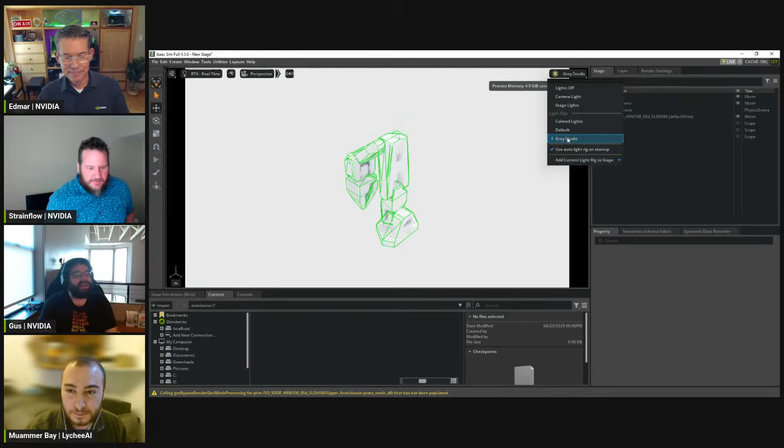So right now we're in Isaac Sim. Isaac Sim is an application from Omniverse, and this is our tool for examining the simulation, which runs all the physics and the collisions, and makes the magic actually happen.

Isaac Lab is a layer built on top of Isaac Sim that's used for vectorizing, which is copying and replicating all of these environments across the simulation, so it can be used for different forms of training. Right now it's mostly focused on reinforcement learning, but we're intending to add other types of learning as well, like imitation and so on.

But I'm curious about the stiffness and damping settings for that import that you did. Did you modify any of those, or did you keep them the same?

Oh yeah, I wanted to talk about that more in detail. I have used the URDF settings here, the already specified settings for stiffness and damping. I've realized that the URDF file has these ratios and parameters which are not loading correctly. I'll show that in a moment. My assumption is that there has been a SolidWorks importer for the URDF, and since SolidWorks is probably operating in millimeters or centimeters while Isaac Sim is operating in meters, some conversions might not be correct. So I wanted to change these afterwards.

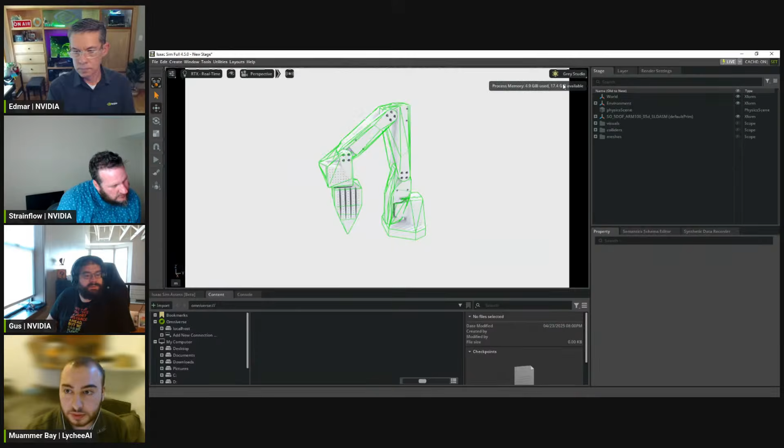Okay, I wanted to show also a very useful tool for starting. It will be under Tools, Physics, and Physics Inspector. This is a very useful tool to see if everything is correctly set up.

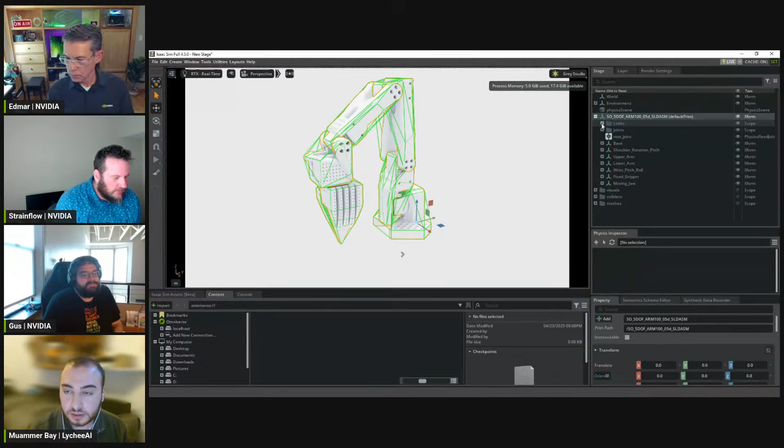So if I click on the robot here, which is already structured well from the URDF file, we have the joints here and all the parts. If I click to actualize, we can see all the joints and play around with the movement. As you can see, the robot is not really set up well because the stiffness and dampings are playing kind of weird. I realized I probably have to change these parameters, and I wanted to show how to do that as well, if there are no questions in between.

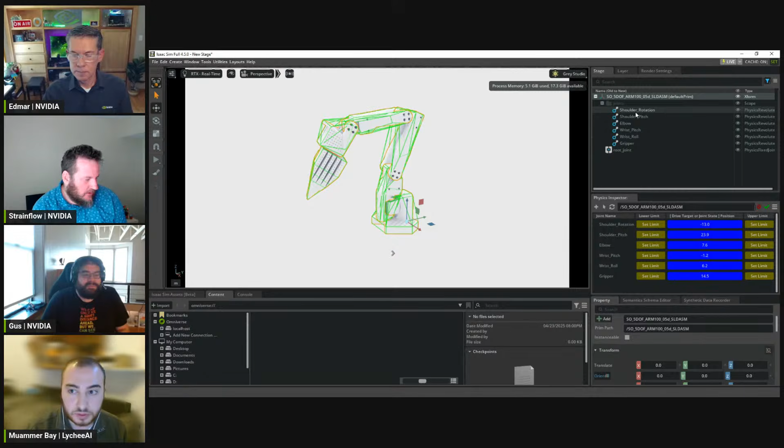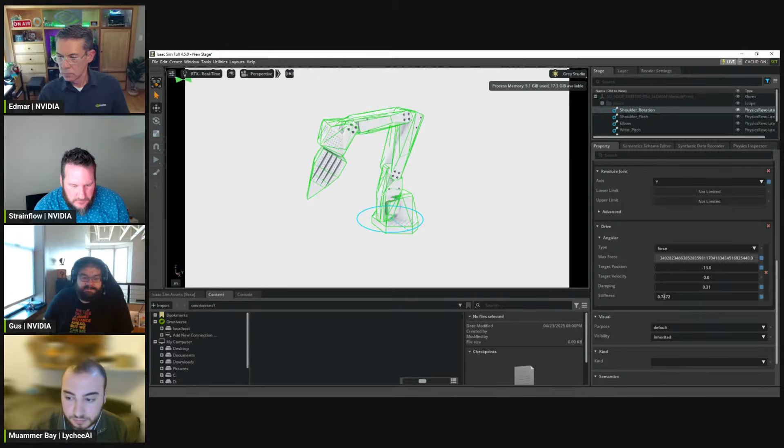What you can also do in Isaac Sim, probably a bit hard to see, but on the top right there's a filter for physics joints, and this will show only the joints here. When I go into the properties, I can see that the damping and stiffness are, first of all, very low parameters, and also the ratio is not set up correctly. When I multiplied it by 100 or 1000 - probably the conversion between centimeters to meters or millimeters to meters - I realized that the values make a bit more sense, but still are not correctly set up, I feel like.

So I just changed the parameters for the shoulder rotation, for example, and as we can see, it's already moving smoother and more realistic than what has been specified from the URDF.

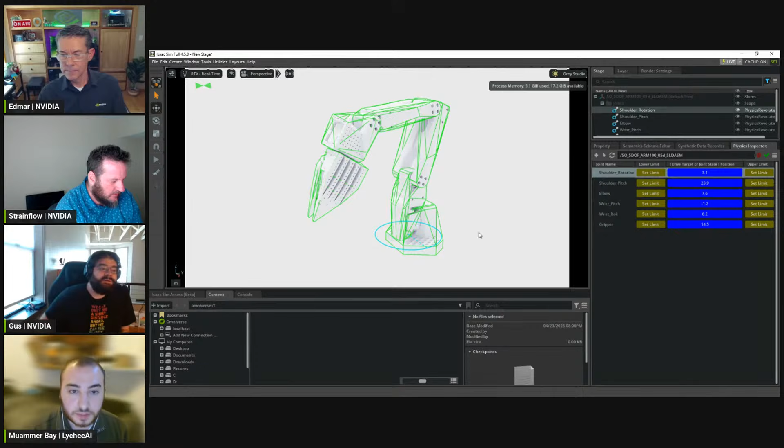At this point, I would also like to mention that I do not have to specify these settings here, because I will do it in Isaac Lab, kind of manually inside the configuration. So I will not play around with these for now, but there are still some steps that we have to do before we can work in Isaac Lab for the reinforcement learning task.

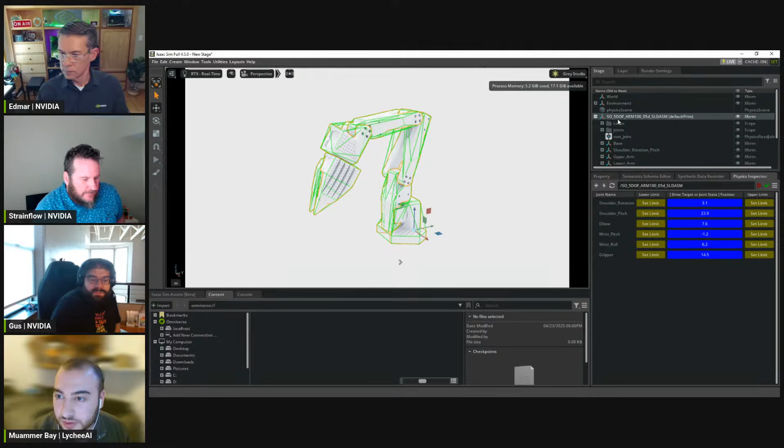Okay, I will continue with that. First of all, one very important step I realized is that we have to specify the articulation root. If we filter the articulation root here, we can see that it's done for the root joint, which will not work for Isaac Lab. Maybe one of you guys can tell me more about how selecting the root joint doesn't work as the root articulation for Isaac Lab.

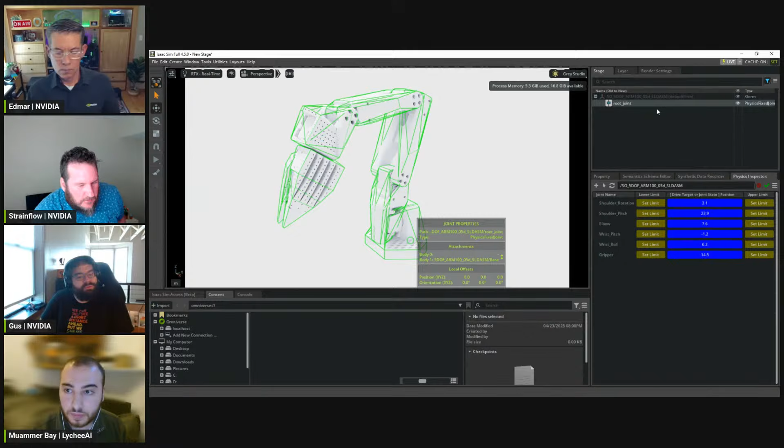Yeah, so the root should be a prim, not a joint. The articulation root - I think you specify it if you go to the root of the robot. So if you disable your filter, go to the root of your robot, and then go to add physics articulation root. You're on the whole container - you probably want to be on the base mesh, not the overall container. It'll somewhat work with the overall container, but it'll just pick one of those randomly to be your articulation root. You want that specific one to be your articulation root.

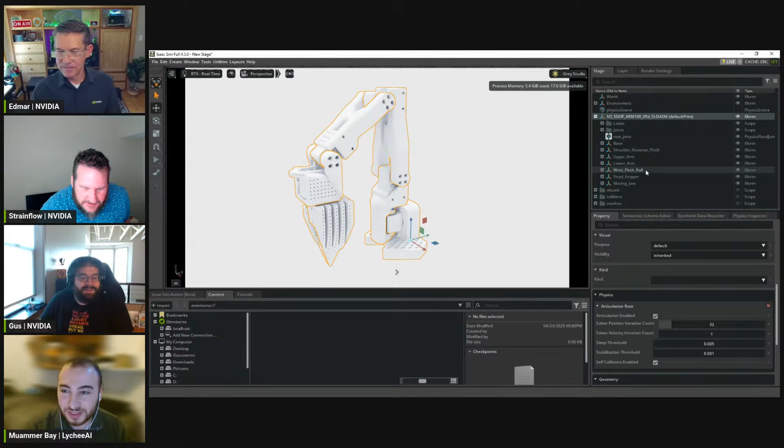That specific one? Okay. Then you want to remove - make sure you remove the articulation root. You just got to scroll down to the physics section on that root prim, find articulation root, and get rid of it - click on the X. Yeah, there you go. Awesome. All right, now you can add a new one.

Yeah, sorry, you're there for a minute. Yeah, no, I wanted to say that I've tried it before, and for me it has worked on this one. So I'm a bit afraid it will not work now if I set it like this.

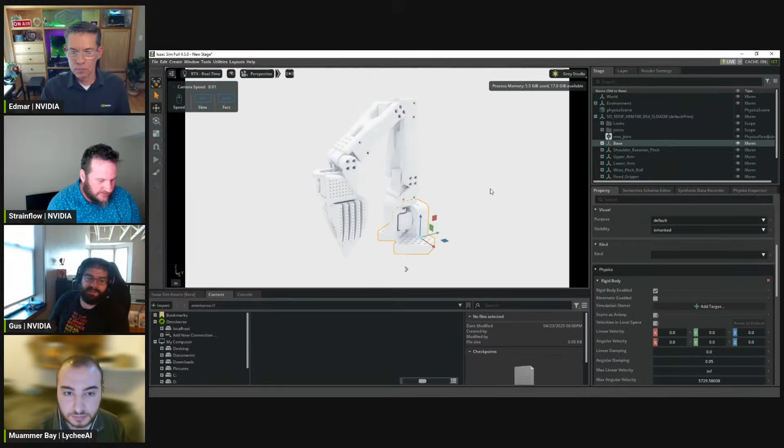But yeah, I always set it on the root prim of the robot, and I let the system identify it, because what the articulation is going to do is notify the physics engine how it needs to access the data in a vectorized form. Behind the scenes, there's this thing called the Tensor API, where all of this data is kept as big giant matrices. The articulation root defines the tree traversal that figures out what all those shapes have to be.

There's a whole stream we could do on getting meshes ready to be instantiable. A lot of people on the forums have problems with adding their robot to Isaac Sim, and when it appears, it's just an empty transform with no meshes there. Part of the reason has to do with this vectorization process—you have to set up the asset appropriately to be copied and instanced many times over the course of the simulation. If that process isn't done properly, you can get all kinds of weird consequences.

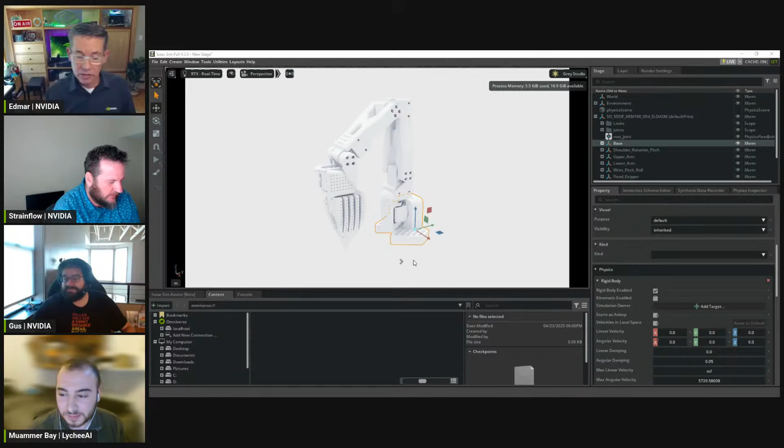Sorry, I didn't mean to derail things. I just want to point out we have a good question here—actually two people asked the same kind of question. What are the stiffness and damping of the joints? I didn't find how they're used in the docs. And Kamade, another viewer I met at GTC, asked is there a calculus for damping and stiffness for Isaac Sim other than just play and sim?

What's going on here is in order to keep the sim performant, we simulate all the joints and motors as dumb as possible. There isn't an electromagnetic sim that simulates stators and stuff. What we have is a simple spring system, and that spring has a spring coefficient, and then there's a damping factor that determines how the spring responds to an applied force. So if you're talking about a rotational force, you're talking about an applied torque and the damping term on that torque—the stiffness and damping coefficients, though I'm not privy to the actual intimate details of how the simulation is done, but it's modeled off of this spring model for the joint.

The stiffness determines how quickly the joint goes to the target you're setting. If you have a drive position or a drive force, the stiffness tells you how quickly that's going to be applied. The dampening tells you how susceptible you want it to be to oscillation—how rigid do you want it to go to that location and stop hard, or do you want it to be a more graceful easing. Those are the parameters that determine that. There's also another parameter called the gain that has to be tuned to get it to match sim to real, but that's a different conversation.

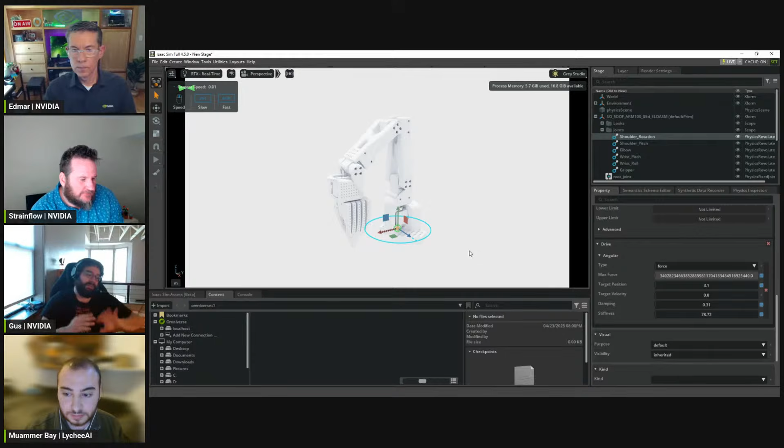Well, those stiffness and damping parameters don't have exact physical meaning—they're more like simulation parameters. When you do sim-to-real transfer, there's a whole type of domain randomization that specifically focuses on randomizing the physical parameters of the simulation, so the policy becomes robust enough to handle the real world with unknown parameters, hopefully within the bounds and range of the simulation randomization we did.

I just want to reiterate that—yes, it's a PD, and I was so confused by that at first. When I was getting started, I was trying to make the simulation as realistic as possible, and coming from a mechanical engineering background, it drove me nuts that those damping and stiffness parameters in the joints didn't have direct physical correlations. But with AI and training, it doesn't always have to be perfectly accurate—it's okay as long as you randomize as you're training.

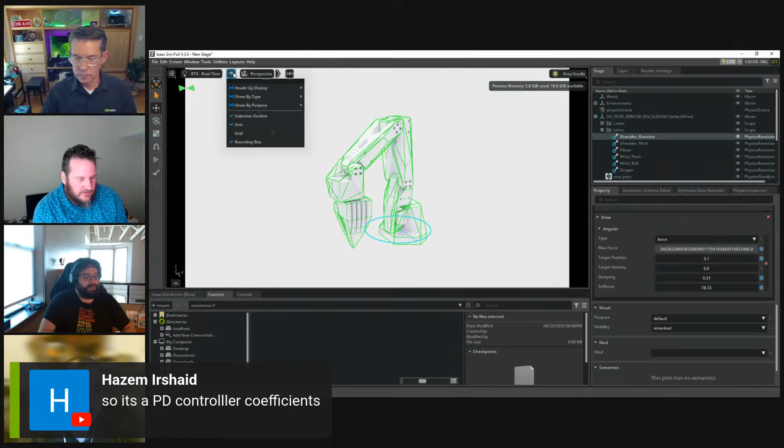One of the members, Hazem Irshaid, asked about the controller - I believe it is a PD controller, and I don't think there's an integral term in the controller for the joint. Isaac Lab provides an actuator layer that gives you much more definition over how you want that joint to be actuated and how you want that simulation to take place. But I think as a default, it's just a PD drive coefficient.

This feels great, I'm learning a lot here. Awesome, so thank you for that.

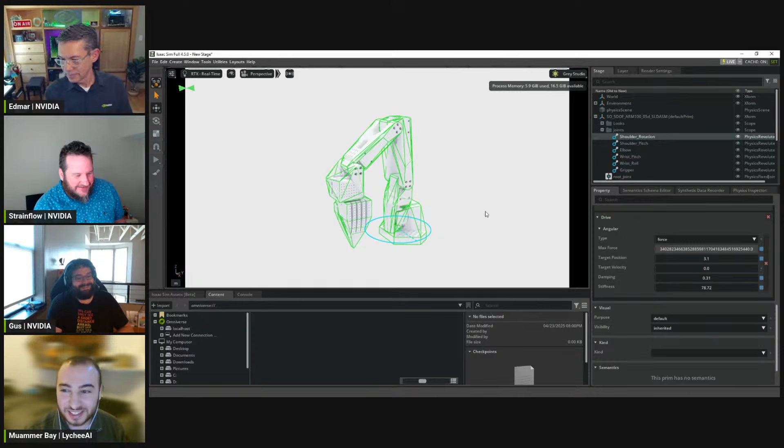I guess I can maybe continue, or do you want to add something? Please, go ahead. I just have to check if I'm not missing a step.

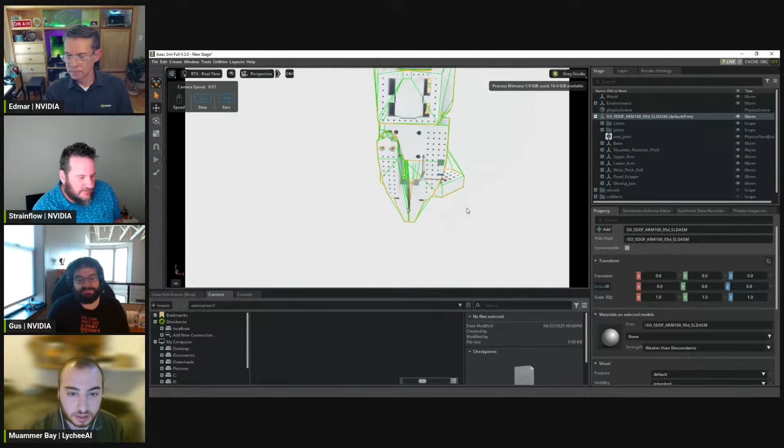The one last thing I would want to change is we see these collision meshes here, the green outlines. Those are the collision meshes, and I want to change it, at least for the gripper, because I want to pick up a cube. When I tried it the first time, I realized that these are not accurate enough.

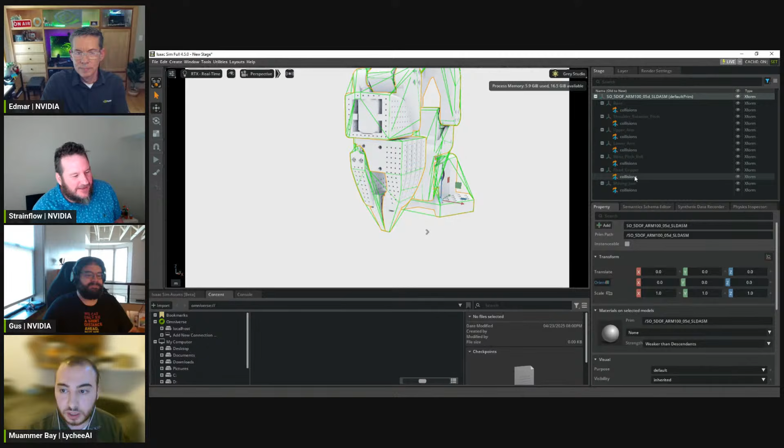I noticed in your import that you chose the convex hull instead of the convex decomposition. I was like, oh, that's interesting. But I thought, maybe we should explain what these are.

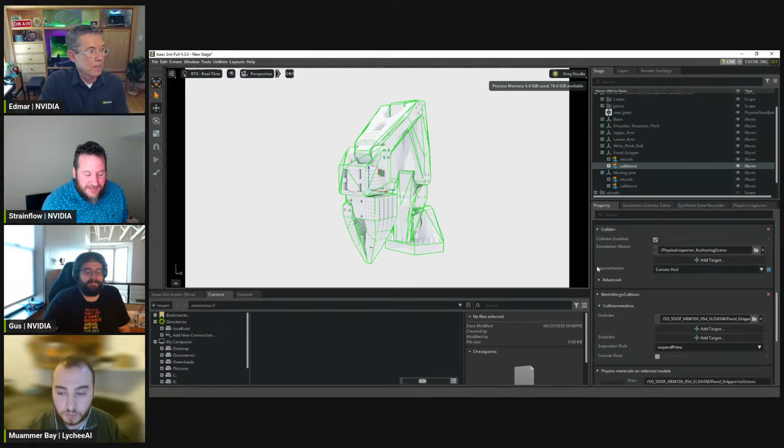It's really easy to see with that base part - if you look at the green lines, you'll see there's some space. The green lines are the collision mesh, and the triangulation in the convex hull is like if you shrink wrapped the whole thing, so wherever it dips in, there's going to be some space between your collision mesh and the actual part. The nice thing about a convex hull is they're really cheap to calculate collisions with, so we like them for that reason, but they're not the most accurate. There's this trade-off between how accurate you want your collisions to be versus how quick you want calculations to run.

I think I would do exactly what he did, which is start off with a convex hull because they're cheap, but then go to things like the gripper where you need more accurate contact and collisions, and put a more refined mesh just on those parts. That was exactly what I wanted to do. I tried the URDF importer and chose convex decomposition, and I realized my simulation was way slower because it's harder to calculate. So I wanted to do exactly what you mentioned - convex hull for the entire system, and just specify it for the parts that are needed.

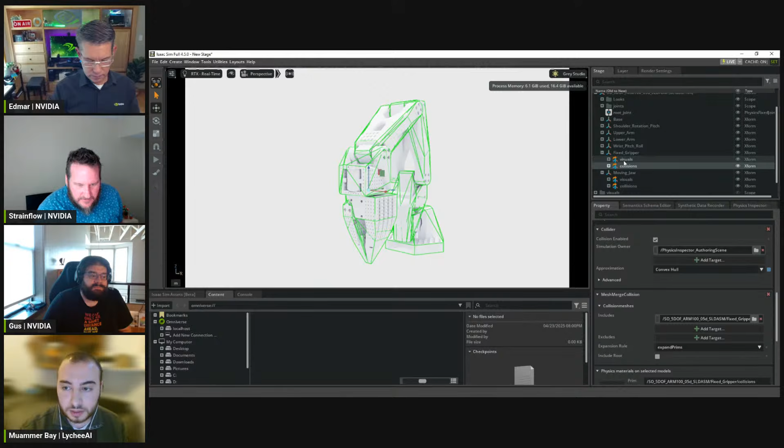So I'll do this under the prim for these, both under collision. We'll change that to convex decomposition. It will take a moment to load - it might take a bit longer to load.

Because we're watching it, it knows when you're watching it, and then it's like I'm going to do it wrong now. Well, when you're sharing your screen, it takes some of your computer's resources, so everything runs slower. That's kind of a classic problem I have.

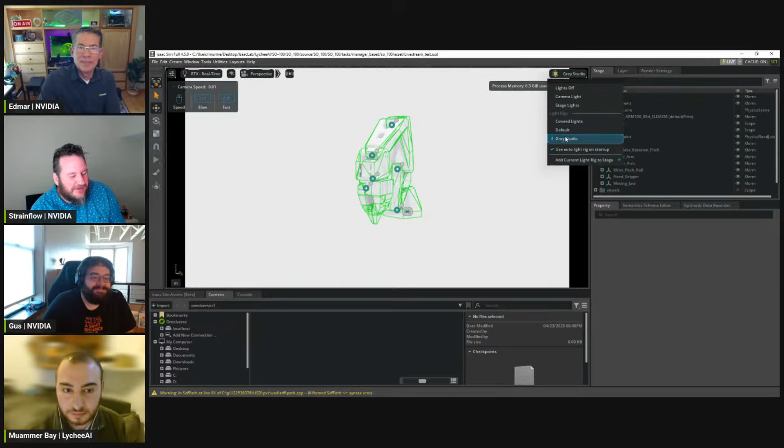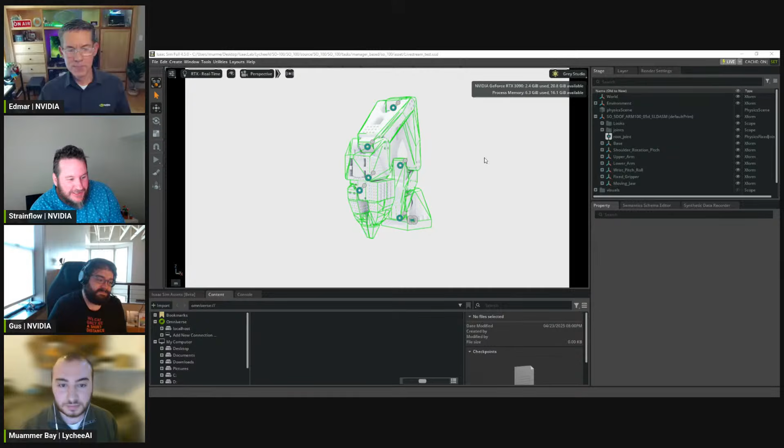But while that's loading, I just want to chime in and say, if you have some funny stuff happening when you run simulations, like your robot arm explodes into a million pieces or flies through the air, there's a really good chance you have a convex hull mesh and self collisions on. What happens is if you have these convex hull meshes for parts like this and self collisions are on, at the first frame you're going to have very deep collisions within the robot, and it's going to try to resolve those collisions with high velocities. So you'll have an exploding robot or solver - it's a fun time.

And so I think the first two things... oh, the Gus bus has arrived. Oh no, the Gus bus has arrived. Gus is an awesome guy to work with, and yes, Gus is awesome. I love it, all aboard, thanks.

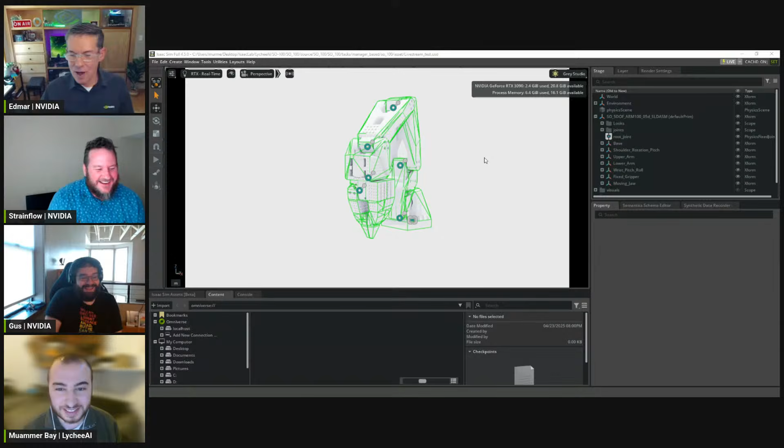We have a quick question regarding the GPU - what are you using right now, Muammer? Just out of curiosity. Yeah, I just activated it on the top right. If you go to type display and device memory, you can see I'm using the RTX 3090.

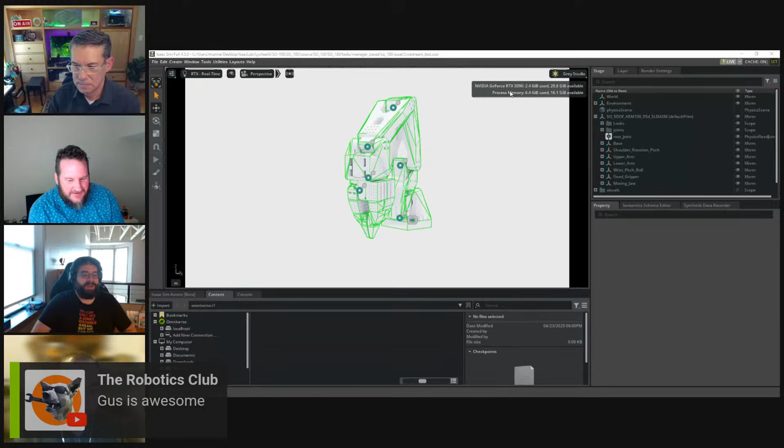That's the same one that I use. It's very reliable. I love the 3090.

Actually, we have an important little question here I just want to address real quick. Can we run Isaac Sim 4.5 on Ubuntu 24 with an RTX 5090? So first of all, you want to be on Ubuntu 22.04. And second of all, we've got a little problem with 5090s right now with the RTX renderer. Is that right, Gus? Well, I don't know enough about specifics, but Ubuntu 24 with RTX 5090, that is about as bleeding edge as you're going to get.

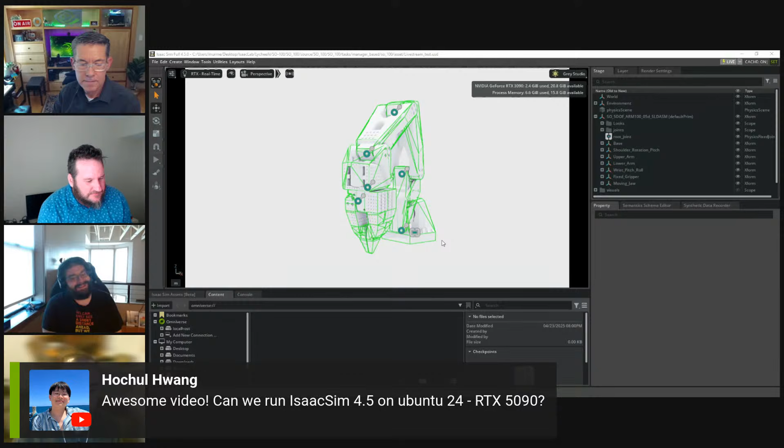Yeah. So eventually, yes, you will be able to run 4.5. If I understand correctly, it's a minor rendering bug that the team is fixing now. Is that correct, Edmar? Yeah, that's right. So there's a rendering bug with 5090s that's going to be fixed in the next release of Isaac Sim. But as far as Ubuntu 24 goes, I would say not until ROS and Jetson are on Ubuntu 24, which is, I don't know when that's going to be.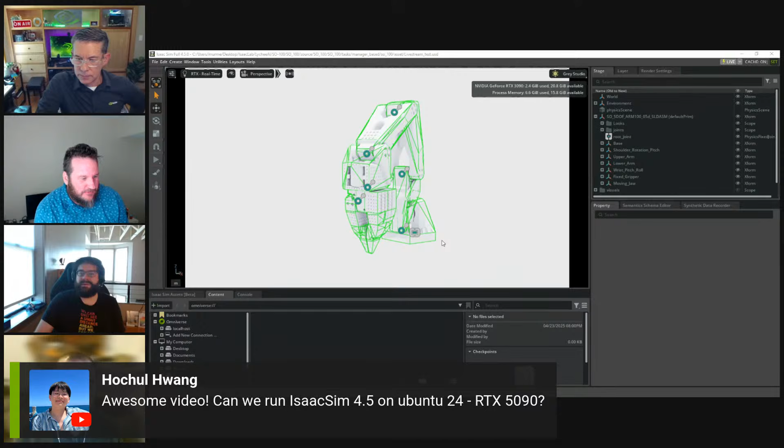I think we kind of follow along with ROS there and support whatever they support. And right now that's Ubuntu 22.04. Yeah. And a 30 or 40 series GPU is going to be your best bet for right now.

Great questions. Yeah, great comments and questions coming in.

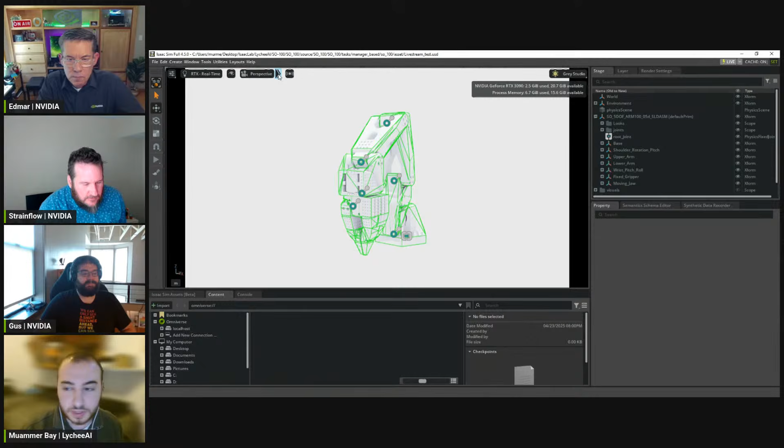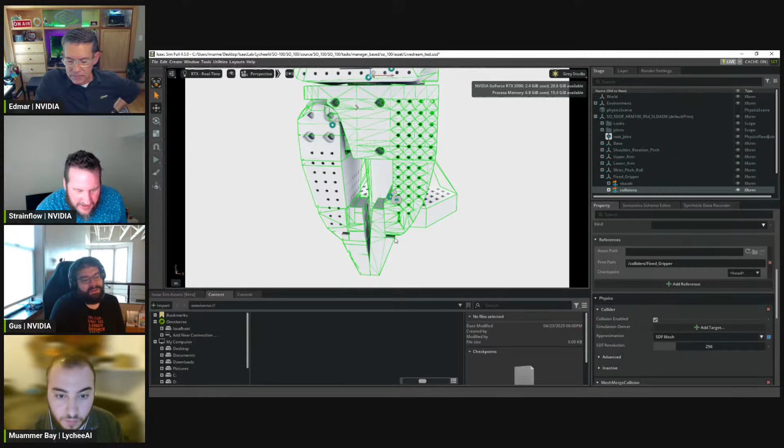And it's showing. It loaded. I just saved it and reopened it because I had an error with my meshes; I couldn't see them anymore. But as we can see, this one is way more accurate, and this one will also work way better to pick up a cube. Have you tried the SDF mesh? No, actually, I haven't. SDF, signed distance function. That's actually my favorite. It's just a little more accurate than the convex decomposition. Thank you, I'll try this one. If you see the really awesome videos with tons of objects colliding, that's usually SDF mesh.

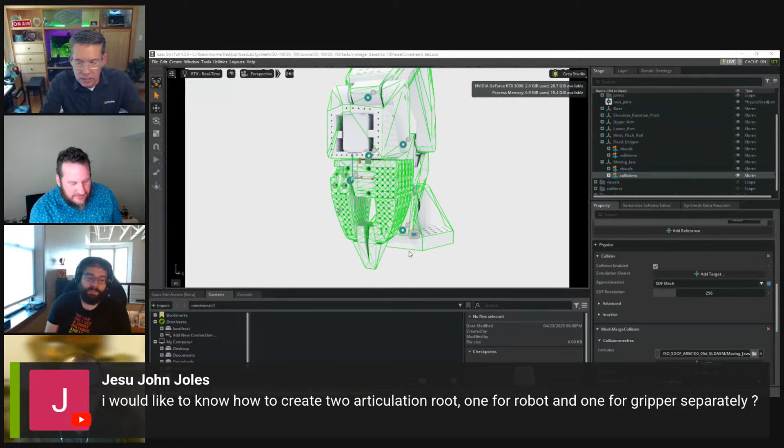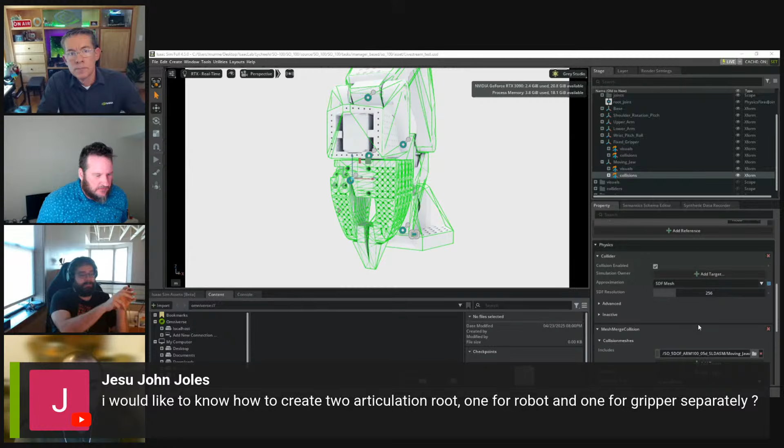We have a question here from a viewer: I would like to know how to create two articulation roots, one for robot, one for gripper separately. You want the robot assembler, and the issue here is that you can't. You want to put an end effector on a robot arm and have it do the thing, right? If you have a single articulation root, then the second articulation root is in the same tree, and it doesn't like that. We have a tool under the Tools menu for robotics called the robot assembler that takes this articulation and modifies the setup so that it has only one articulation root with the gripper articulation in place.

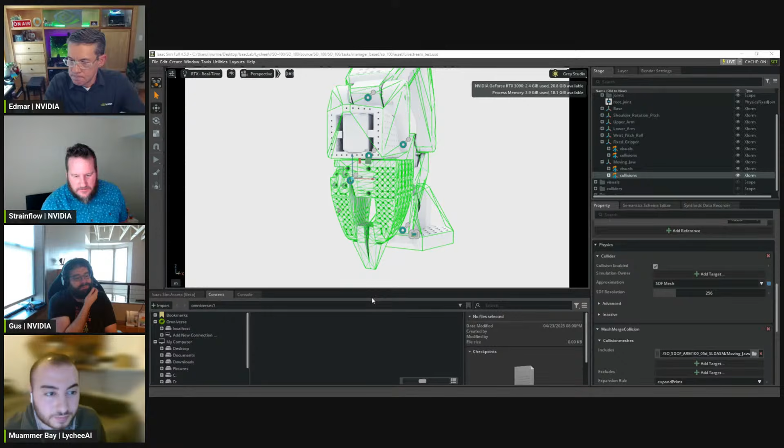I think there is a different way of handling it if you want to control just the articulation for the gripper, like a hand that has a lot of different parts to it. I don't know if that's supported natively yet. So you can't have two articulation roots in the same chain right now as it stands, but there are workarounds, is the TLDR.

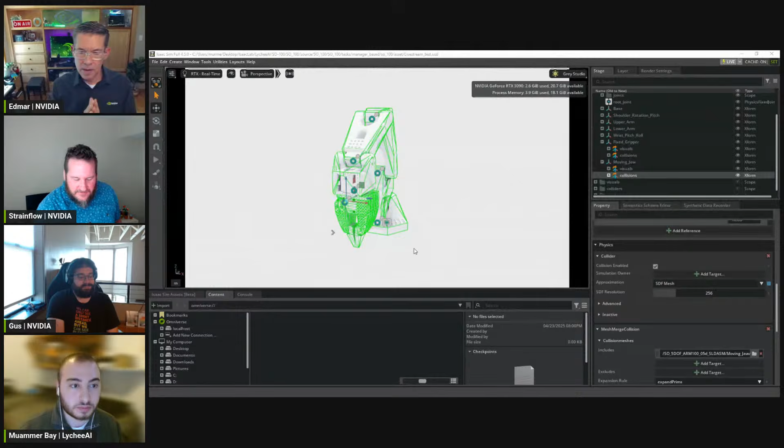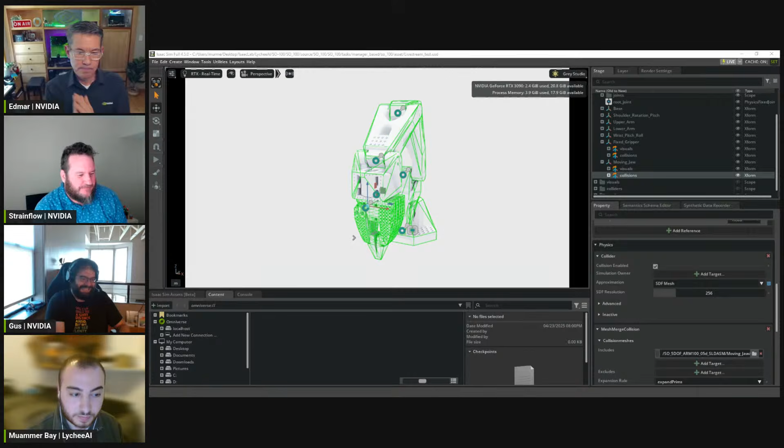Now, while he's doing that, Eric or Gus, do you want to quickly explain the difference between Isaac Sim and Isaac Lab for people who might be joining late or not familiar? Sure. Isaac Sim is the simulation itself. It's the thing that runs all of the physics and the rendering. It runs all of the interfaces for the GUI that you might want to have.

Isaac Lab is sort of a layer that sits on top of Isaac Sim, and it provides all of the API that's necessary for copying environments many, many times in the simulation in an efficient manner. I refer to this as vectorization. The back end is often referred to internally as the tensor API, which is the thing that takes all of the data for all these many simulations and then packages them into nice tensors that can be manipulated on the GPU. So yeah, that's the big difference between the sim and lab.

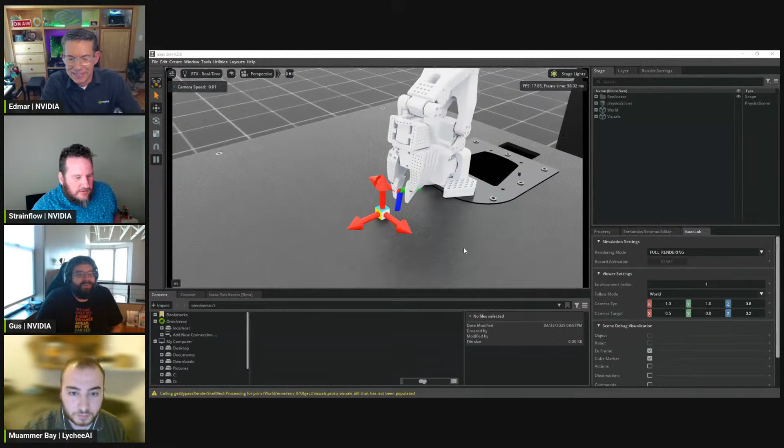Yeah. How many environments do you usually use when you train this thing? Yeah, usually I'm training in headless mode, meaning I'm not loading the simulation on screen. Oh, I guess I have to share my screen. One second. Yeah, usually I use the headless mode, which allows me to have more environments because I'm not loading the... No rendering. Rendering, exactly. And there I usually use 4096 environments. Oh, wow. There you go.

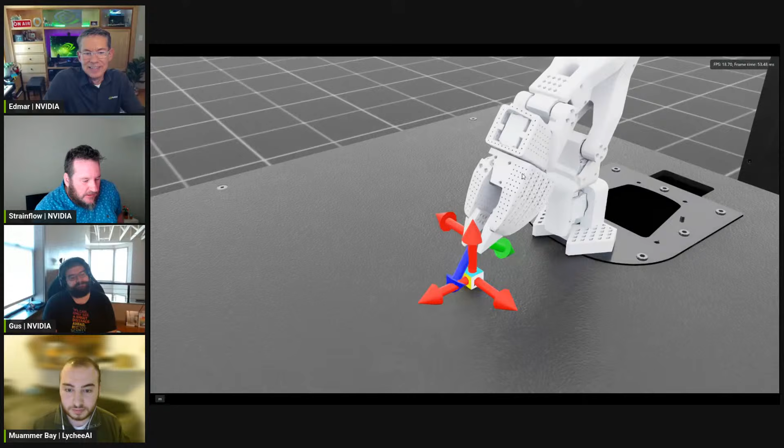And just so y'all know, this is a baby manipulator. It doesn't know anything. Its brain is completely undeveloped. So at this point, it's just taking random actions, but then it gets rewarded based on what Muammer said, probably getting closer to the cube, I would guess. Well, I would love to talk about that. What did you figure out for your reward function for this? Or where are you starting with your reward function? Because this is a process that's ongoing. So what's your initial reward so far?

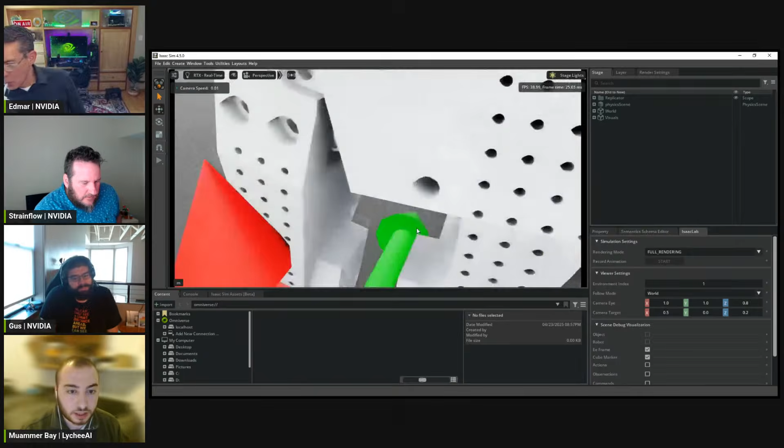Right now in the simulation, or what exactly is meant? I'm confused. Oh, sorry. The function itself. How do you determine what the reward should be? Is it distance to the cube, orientation of the cube? Yeah, I just stopped it to showcase this. So the reward is the distance to the cube. I put a marker for us to see the end effector. This marker here should be in the middle of the cube. And in order for that to happen, this gripper has to be open.

And once it's in the middle of the cube with this end effector, then it's randomly realizing that it can also close the gripper. And once it's doing that, it will do some random actions to randomly lift the cube. And there is also a reward for the cube being lifted. This one is a very high reward, so it's basically learning to lift the cube. And it's doing that by exploration versus exploitation.

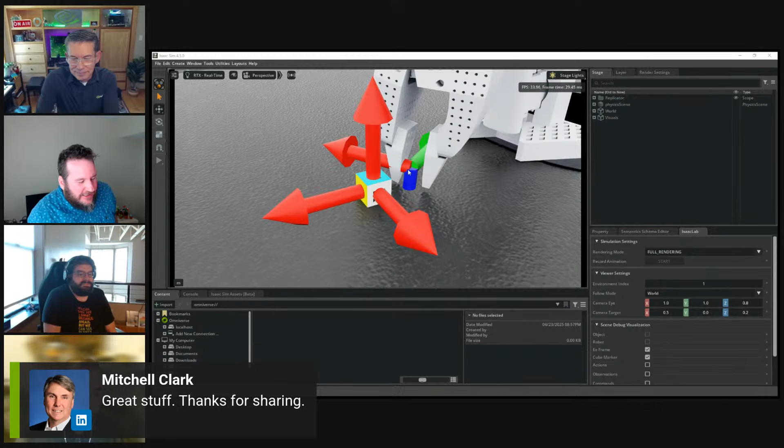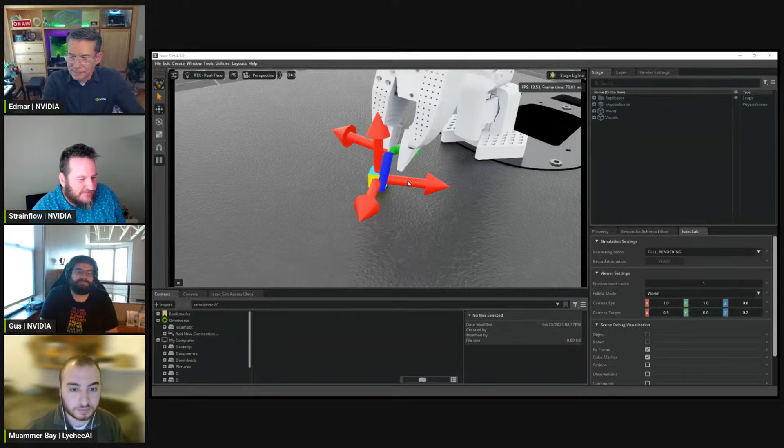That's really interesting because I'm tempted to give it as an observation the next step and break it down into steps for it. First give it a reward for getting into position, then a reward for closing, and then switch modes and give it a reward for lifting it. But you're giving it one composite reward, and it's figuring out how to plan it. It's doing the planning by itself, which blows my mind, that with some simple rewards you're teaching this robot to plan ahead.

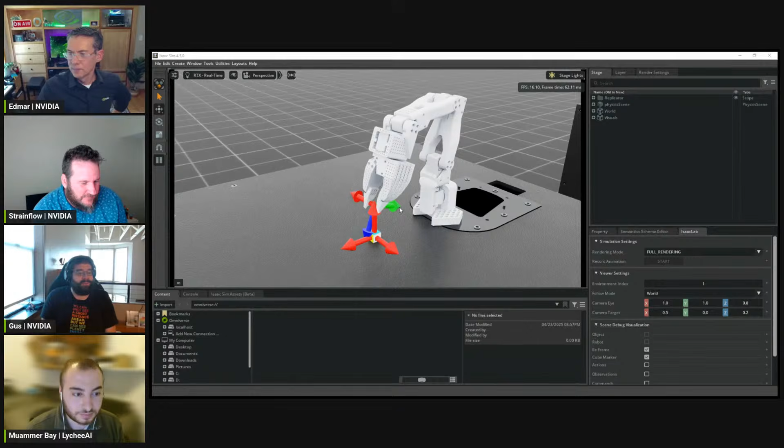Well, that's an interesting thing to talk about, though: what are we really training here, and is it really planning? The policy is a mapping from the state space to the actions of the robot. So we can imagine at every possible 3D coordinate a function that gives us a vector of what direction the robot end effector should move in. The policy is in part what defines that vector field, but there are additional dimensions because it's not determined explicitly by 3D position in space, but by the combination of values of all the joints of the robot.

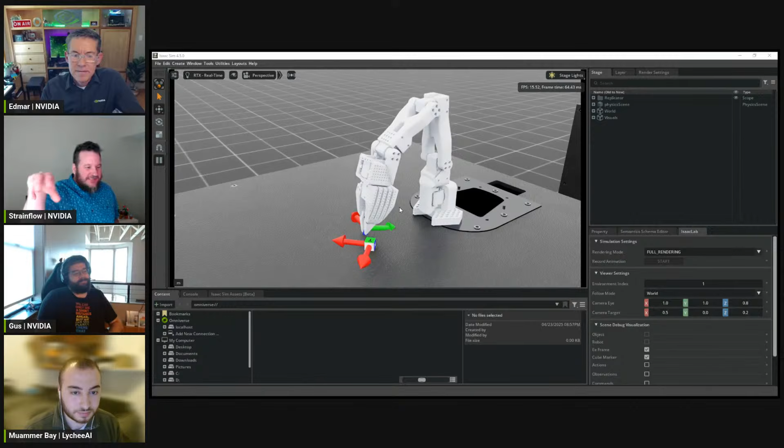Sure. So I think it's learning that the flow around the manifold changes depending on the gripper's state. It learns that if it's in a state where the gripper is not next to the cube, it's got to move to the cube, and it's got to be open. But once it's in a state where it's around the cube, it knows the gripper should be closed and it should be lifting it up. You know?

I hesitate to say that it's planning, right? I hesitate to say that it's like making a sequence of decisions so much as it is learning exactly what you said. If I'm in this state, I have to do this thing. If I'm in this state, I have to do that thing. Yeah. Well, I can see why you don't want to just call it straight up planning, but in my mind, it's a very simplistic form of planning. You know?

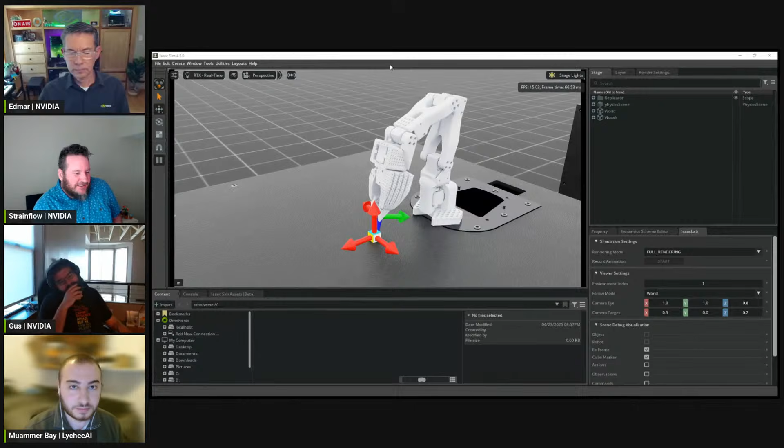It's not like it's figuring out a whole plan. Maybe, I guess you could phrase it. It does different things depending on the state, I guess. But that's the whole point of the Markov decision process: these robots can learn to do different things depending on the state. It's not really decision making, right? I'm being pedantic. It's all right. It's all right.

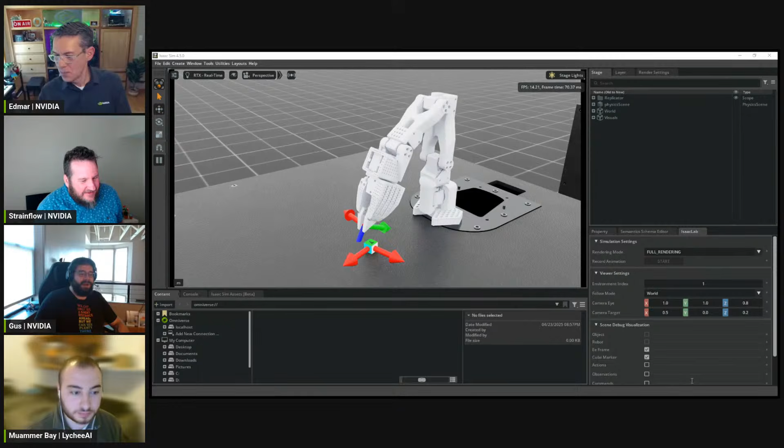Oh wow, it's really going for it. Look at that! Wow. Yeah, it's figured it out, isn't it? With only 32 environments too. Yes. So if you run this headless, what's your final product look like with this current reward function? Yeah, can you run us a replay? Yeah, I can try to find it. I'll just have to look for a second.

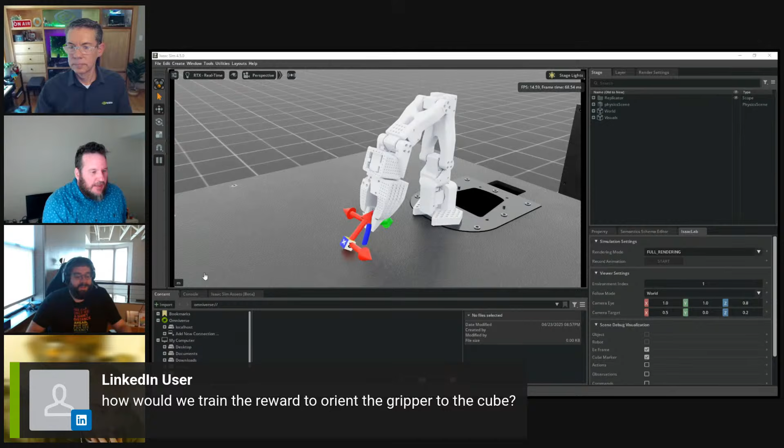Question from LinkedIn user: how would we train the reward to orient the gripper to the cube? Well, he's kind of doing that, he's just rewarding it for getting closer to the cube. But you can also look at the orientation of the cube compared to the orientation of the gripper and reward it or penalize it depending on how close those orientations are. So you can reward it for being closer in position, but also for being closer in orientation. You could calculate the upward face of the cube because you can assume it's not going to be on some cocked edge or corner. So there's always going to be a top surface.

That gives you a position for the normal vector, which is always going to be vertical. And if you want to align to pick up the cube vertically, then you would calculate the vector that points from the center of the end effector to the tip of the end effector, and you'd calculate the inner product between the up direction and this orientation vector and reward when that inner product is close to 1, right? Or reward based on how close the inner product is to 1. That would train an orientation component, right?

Well, there's some details. Let's just say there's some details there. Tons of little ones. Yes, we could have a whole session on just reward tuning if you wanted to. But essentially that's what you do. Yeah. And you watch out for degeneracy. Oh yeah, and there's so many little details, but yeah.

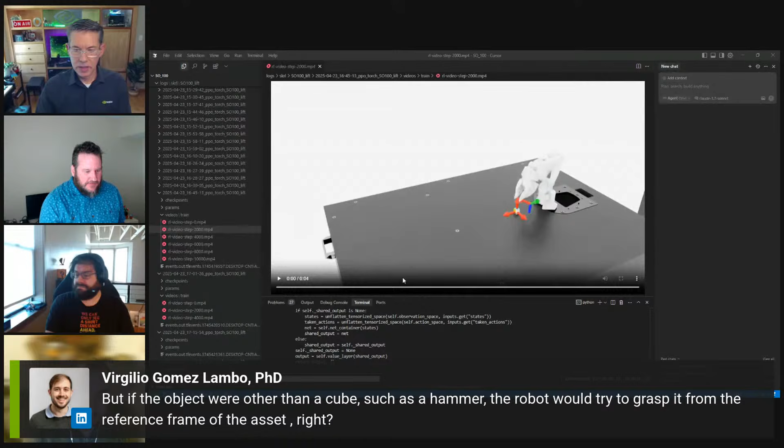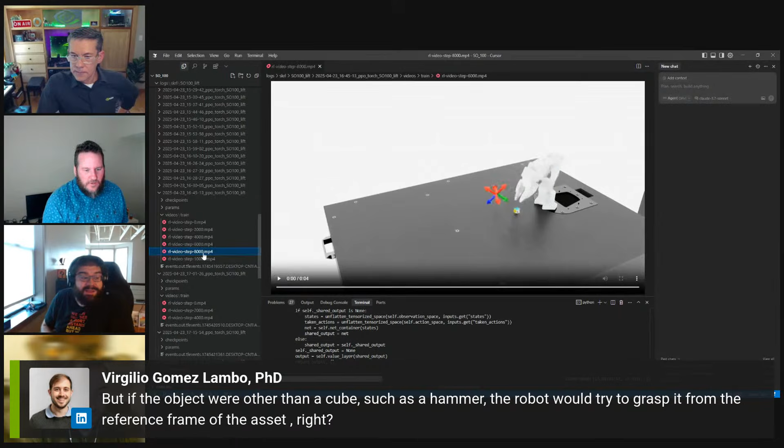If it was other than a cube, how would you do that? So basically, you can tell the robot, you can reward it for lining up or going to whatever you want. It doesn't have to be the center of mass. Wow. Whoa! Just a second. That's fantastic. That is amazing. Holy cow. I just want to quickly mention that is after 5 minutes. 5 minutes? Wow. I think this is 6,000. That is so cool. Fantastic work.

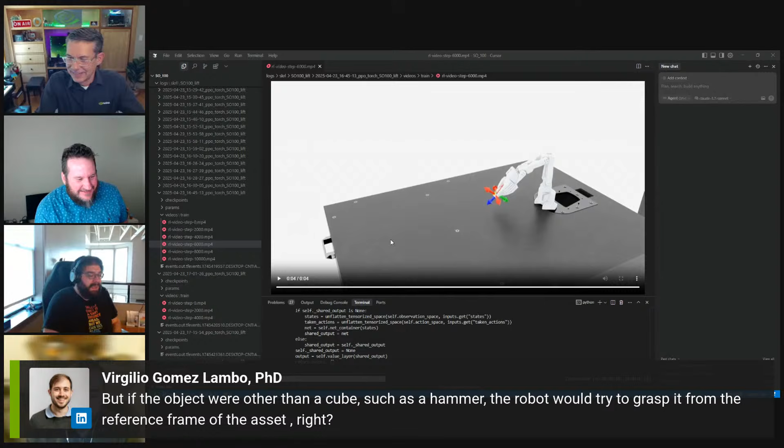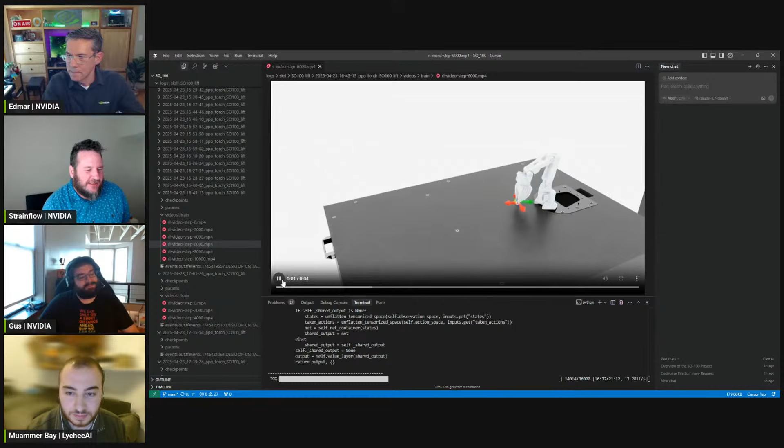Now we need to get it to put the end effector. We need a policy where if we give the end effector a pose, so an XYZ coordinate and an orientation, it will navigate the end effector to that pose. Because then we can do leader follower, right? We can do that exact teleoperation goal. Yeah. Or I was going to say you get rewarded for getting the cube to some other location, so then you have a pick and place. Yes, you could train a task. You could do that.

Interesting. That's so cool. The curriculum is key for sure. I think for this kind of task, having it change depending on the state. Yeah. I love it. It's so fun because I haven't worked with manipulators myself much at all. I've mostly been working with the mobile vehicles, and so it's fun to see a manipulator go with reinforcement learning.

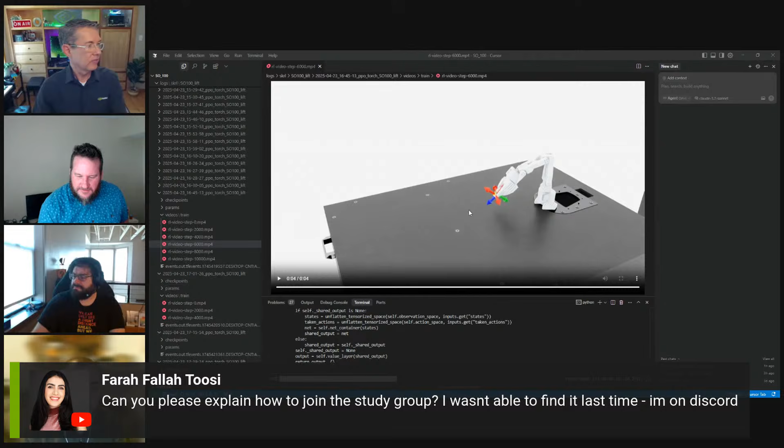If you scroll down on the left, you'll see some channels are broken into categories. We have a category specifically for study groups, more towards the bottom there. You'll see OpenUSD, OpenUSD Arabic, and then Isaac Sim, Isaac Lab.

That is where the Isaac Sim, Isaac Lab study group discussion and weekly meetings happen. If you go to that channel, there'll be a discussion of what's going to be happening, and then they go into the community room. Use that channel in Discord to talk about it.

When the study group actually happens, when it's live and everyone's meeting, which is going to happen in 15 minutes, you go to the community room, which is on the left side. The community room channel has a little icon next to it with a speaker, so you know it's a voice channel.

You just go in there, and that's a channel that lets people actually, instead of typing, you can also type there, but it's more meant for voice. You can unmute your microphone, show your webcam if you like, or use a little text feature that's in there also. It's basically a Hangout, not unlike the one we have right now.

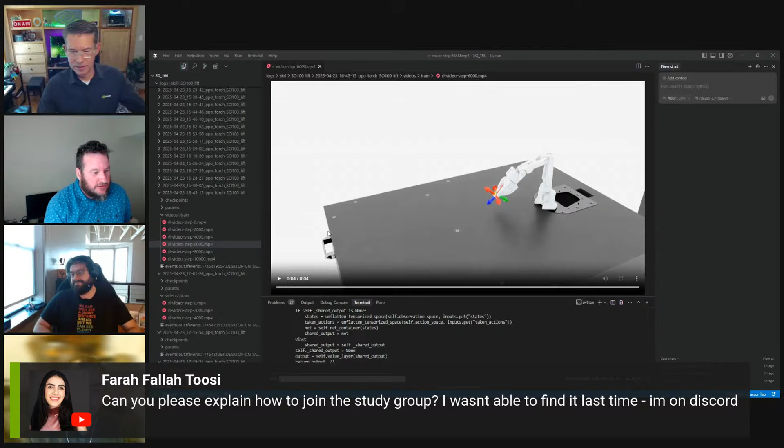Highly encourage it. Eric will be there. I think the difference is you can talk back to us, and we can see your screen if you've got a question or something to share. Yeah, so that's how you do it. Let me know if you have problems, Farah, I'll be glad to help you. Just ping me on LinkedIn.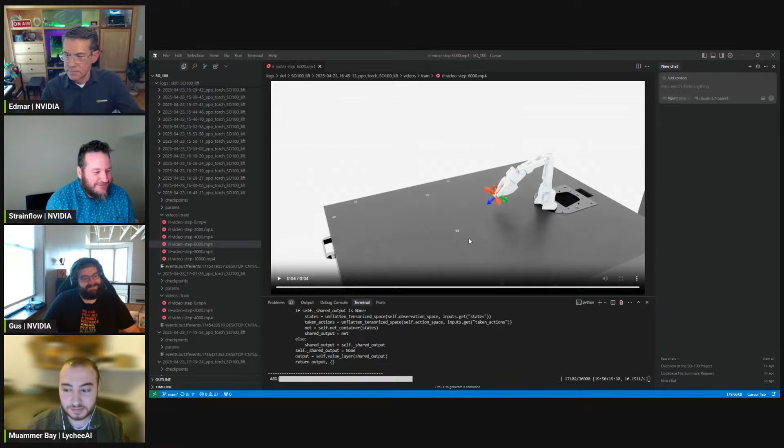Yes, of course. In all the videos I see on YouTube with robots that are trained, they take hours and hours and hours of training, with people who have a PhD in reinforcement learning. What you've seen here today is a sample developed by someone who does not have a PhD in robotics. Or do you? No, definitely not. He learned how to do this in a few months, and he can train this in like 15 minutes. It blows my mind, absolutely incredible work.

This stuff used to be just absolutely for the elite, and it's not anymore. If you're interested, you can learn to do this, and you can do it on an affordable workstation at your house. The barrier to entry for robotics has been lowered so dramatically over the past year, even several months. For people who were following or got lucky enough to attend GTC 2025, robotics was everywhere, such a big step forward from last year.

I'm super excited to see what's happening now, a few months later, at the robotics summit next week. Yeah, that's gonna be super exciting. So I'll be sure to share what I find there on our Discord server.

But Muammer, tell me a little bit about what's coming next for you. You have this great YouTube channel, LycheeAI, and this hub, LycheeAI Hub, which is basically collecting community resources. What are you working on next?

Yeah, thank you. So right now I'm working on the project for the SO100, with everyone that is collaborating. I plan to invite also a lot of people for other projects and to cover these. For example, I have already planned to collaborate with a startup that is working on humanoids, and also an individual, a very awesome guy that is working on quadrupeds. I want to cover them in interviews on YouTube to show people what's possible with Isaac and Isaac Lab, and you can expect many more videos for projects.